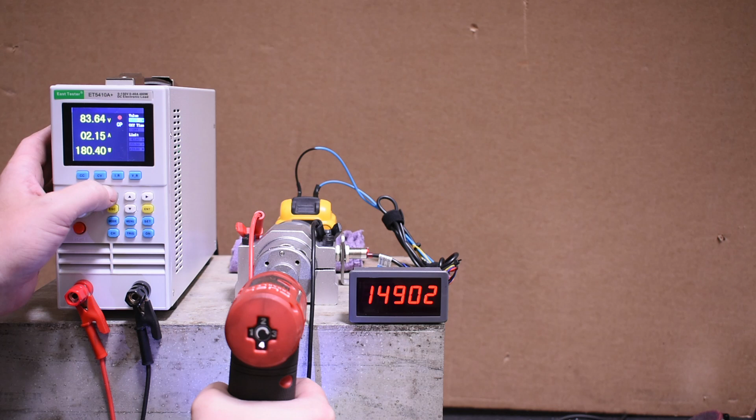We've been testing die grinders lately, specifically cordless ones, and how they stack up to traditional air tools they advertise as beating. Last time we tested the M12 die grinders from Milwaukee, which, while probably the closest in size to traditional air grinders, don't compare to 1/3 horsepower air tools they advertise to beat. At least for us, when trying to extract the most watts or horsepower these tools can muster, putting them closer to 1/4 horsepower tools when comparing apples to apples.

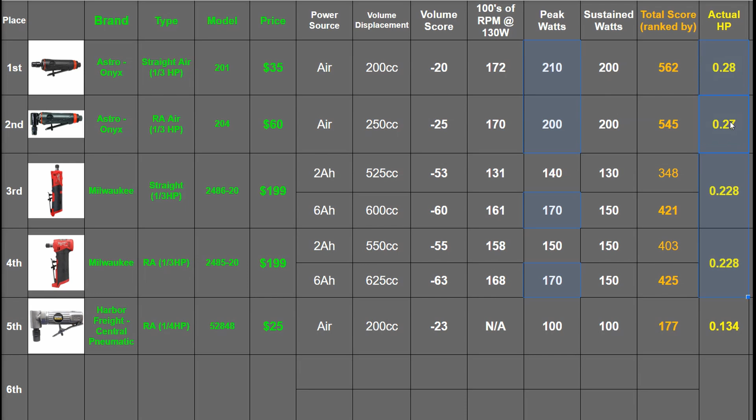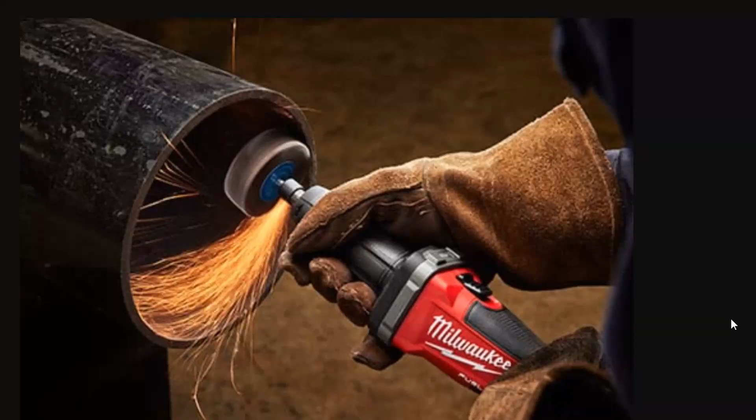Today we add 2 entries that hopefully change things in the horsepower department. Frankly, we set out to purchase 3 or 4, but there's not a lot of options when we're talking cordless in this class. But we bought this Ryobi HP PSBDG01B, which retails for $149. It's not the same size as an M12 right angle grinder, but perhaps that's a good thing for making more power. It is 18 volt instead of 12 volts, yet still miles smaller than Milwaukee's latest M18 die grinder they're coming out with, so still very much in this one-handed wielding class of die grinders. And for all that girth, it's a $50 cheaper tool as well.

So will that size mean more power? Well, the Ryobi doesn't advertise any power figures, simply that it's up to 2 times more powerful than pneumatic, which we've seen how that's gone before from the same outfit at TTI. And speaking of TTI, since they make both the Milwaukee and this Ryobi, perhaps it's not advertising power levels to not compete with the Milwaukee?

We'll see. And when we're talking pneumatic, we've yet to test anything bigger than 1/3 horsepower, so we're certainly going to rope in the help of the comparatively cheap $60 Chief brand from Harbor Freight in their 1/2 horsepower rated CH14ADG. While 1/3 or 1/4 the price of these other 2 cordless options, it's still 2 to 3 times pricier than other right angle grinders from Harbor Freight.

So all of this is going to allow us to do a few things: see if the bigger Ryobi makes bigger power, compare that to a step up in the air tool category as well, and something we've been very curious about, Ryobi's batteries, a complex and convoluted arena of options from the brand that has, at least on one occasion, caused them to call us out when we purchased their high torque impact wrench and didn't use the quote-unquote right battery.

Which the one they suggested isn't sold with the tool, by the way. They've got standard, HP high performance which is different than HP, and 21700 cell packs that they've made. So we're curious which makes the actual most measurable horsepower with no impact mechanism or hammers losing any of that in translation, just a big brushless motor versus a generator. We want to know, so maybe you do too.

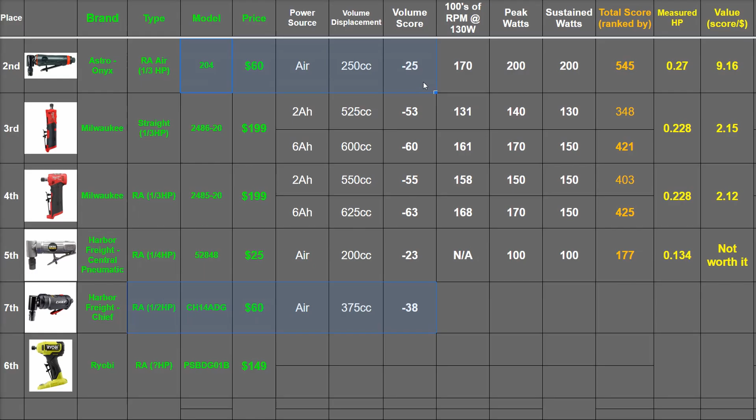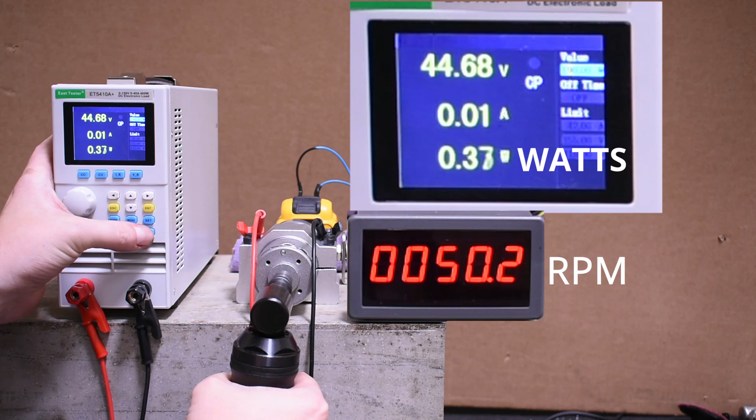Our first go at the dyno here is to see what kind of RPM this tool makes under 130 watts, which is sort of a power level you should expect from most grinders. The Chief makes about 17,000 RPM, similar to the 1/3 horsepower tools, and a little above the M12s with a large battery. Starting off at about 170 watts, which is the most an M12 will make, the air tool is pretty much unfazed here. Barging into the mid-200s, this tool slows obviously, but is still able to easily power through those levels of load.

270, 280 watts, 290, 300, 310, and it's starting to work harder. 320, you can hear it struggle, and you need to lessen the load for the tool to recover RPM again.

After repeated testing, we found this tool likes as much as 300 and can take 320 watts in short bursts, so it gets 320 peak here and 300 sustained. This is with high flow fittings, 3/8 line, and 110 psi.

But what's that in horsepower? 0.43 horsepower as measured, which with the efficiency of this motor run as a generator at this RPM would be in the neighborhood of just over 1/2 horsepower, but we mainly use this for comparison reasons anyways, like most of the figures on this channel.

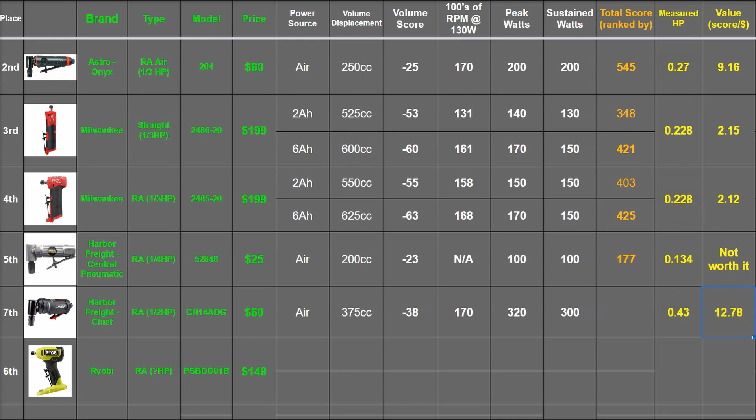I feel this very much is a healthy, and dare I say it, good 1/2 horsepower right angle die grinder from Harbor Freight. With a 3-inch disc, you could get it to slow sometimes, but in most situations, not really bogged down. It's pretty powerful. And it feels rather balanced too, no vibrations like we got from the cheaper Harbor Freight grinder.

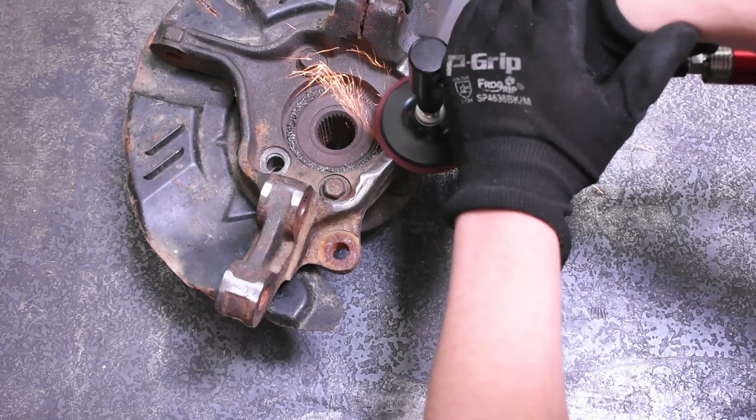With this range of power in the books, I feel we have what we need to place that Ryobi now. This 1.5 amp hour battery is barely able to do 130 watts. Maybe ours is just old. I can't get myself to buy another one of these at this kind of performance though. I say skip that one.

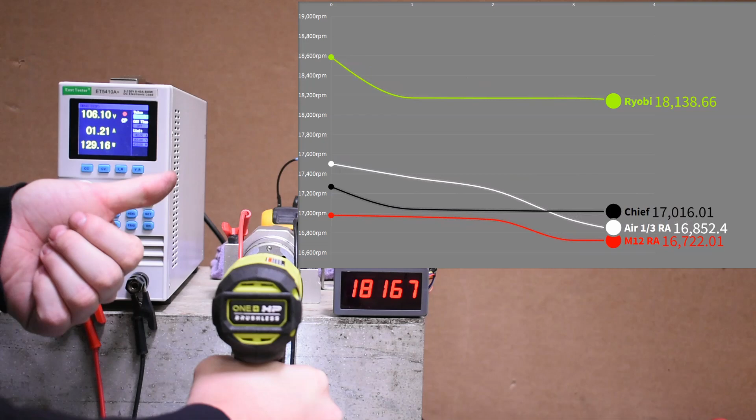Here's one of their standard bargain 4 amp hour batteries. At 130 watts, it makes 18,100 RPM, which is much better, the most revs we've gotten from any die grinder at this load ever. With most batteries from here on out, this Ryobi makes similar RPM at this level.

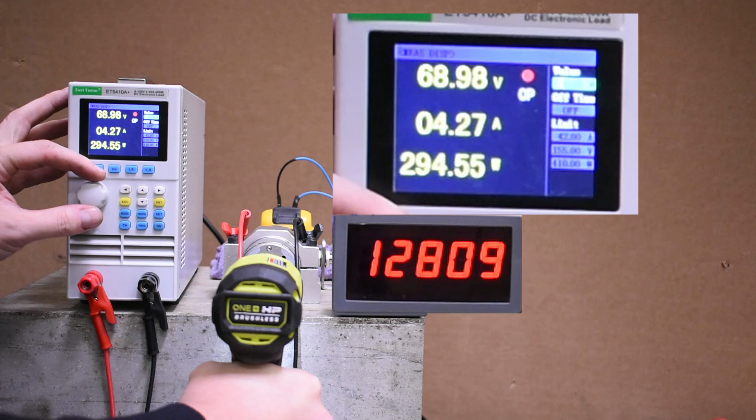Let's see what this 4 amp hour can make. 170, 180, 190 watts, 200, 210, 220, 240 watts, 260 watts, and at 270 and 280 it does dive in RPM but can keep it up from there. 290, 300 watts, and it really digs in and becomes quickly tapped out. So 290 watts or so here.

Oddly, we found that the HP battery, the 4 amp hour, also sees similar results. At 300 watts, it can do that more capably, but does fall off at that level and is more comfortable when turned down lower. So similar to the standard 4 amp hour.

Now for the P195 3 amp hour battery, our favorite choice, and therefore Ryobi is discontinuing it, of course. It's got one row of 21700 cells. Picking up where we left off: 290 watts, 300 watts, 310, 320, 330 watts. 340 causes it to dive a bit, and the tool eventually cuts out into protection mode at 330 watts again, and it would do that each time. So 340 in brief peaks and 320 sustained is what it can make.

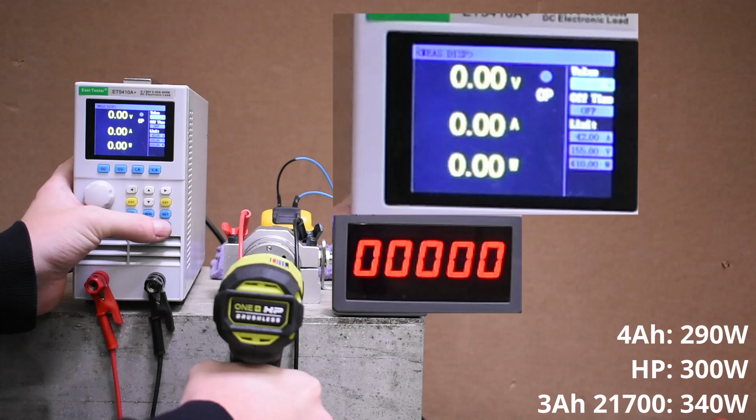Now for the battery Ryobi suggests in place of that one, saying it's better than the 21700 cell 3 amp hour pack, and wrote to us saying as much. The 4 amp hour high performance, this high performance being written out in full here. 280, 310 watts, 320 watts, and we found even after letting it cool off, it didn't like much more than 310 or 320 watts. Who knows why? Maybe it's because this tool doesn't have HP contact pickups.

Not sure though, it clearly draws enough power to warrant those pickups, and I feel at $150 it may deserve it too. Even before we clip on a huge 9 amp hour, this tool gets dinged quite a bit for its footprint. This Ryobi required us to buy a new water jug, tipping the volume scales at 1100 cc's for the compact 3 amp hour and 1200 for the 4 amp hour high performance, almost 1225 on that one. Which means, yeah, it's big in comparison to all of these.

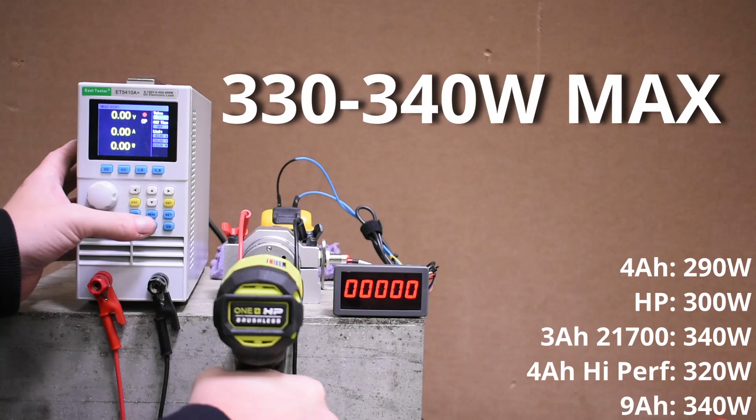Now the 9 amp hour, that's also big and powerful, yes, but it just causes this tool in particular to enter into protection mode quicker than any other battery. 330 watts is as much as any battery is going to deliver with this tool. But that's pretty dang good. 340 watt peak, 320 watt sustained is as much as 0.46 horsepower, beating out what we felt to be a very beefy air tool in that Chief.

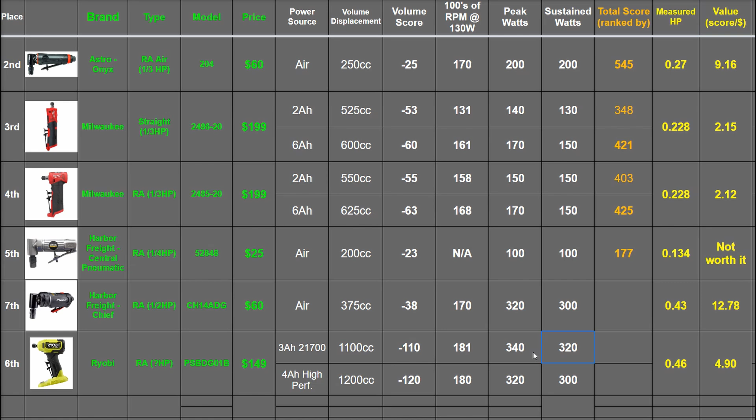We could not get this tool to enter into protection mode while just using it as a grinder, and very rarely would it slow down until you used a battery that wasn't fully charged, which is my main complaint with the Milwaukee tools. They enter into protection mode all the time, so this sort of solves that most of the time. Now let's see what that looks like in the points.

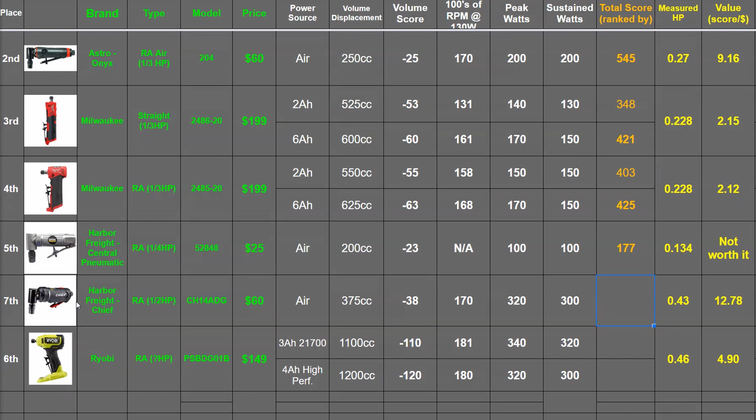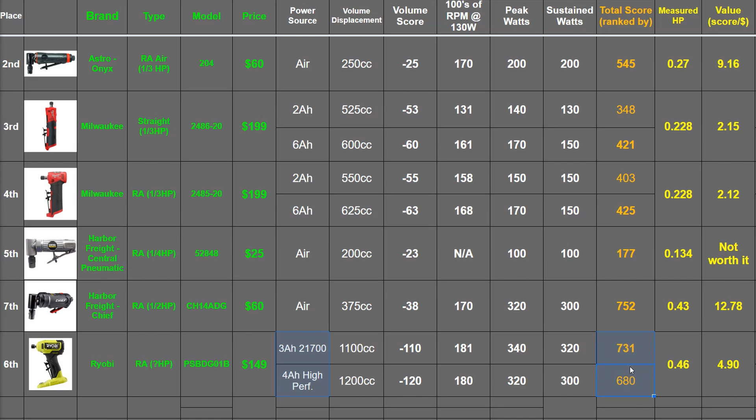The Chief gets a 752 with its smaller size and price, and the Ryobi gets a 731 with a 3 amp hour battery and 680 with a 4 amp hour high performance. Putting the Chief in first, but being way closer than we thought with this kind of hamstring over here.

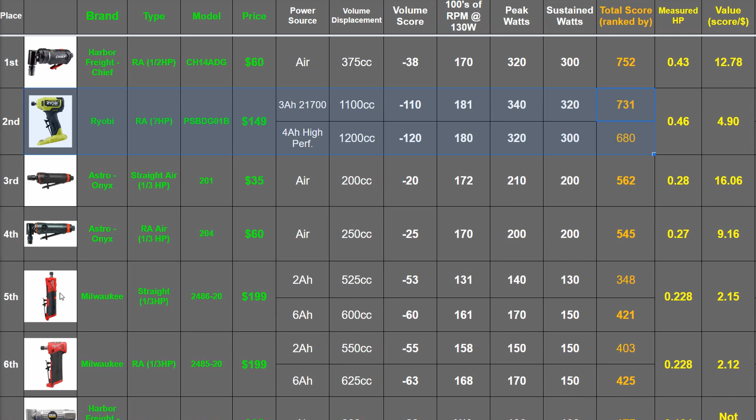Certainly the best one-handed cordless die grinder we've tested, and considering there aren't a bunch of these out there, maybe that exists. And the lowest price one on the market as well. Considering Ryobi's sometimes awkward battery shape, fully on display here, it makes you wonder what a brand like DeWalt could do with a 20 volt die grinder this size, but with a power stack. Until that day or something similar, the Chief is pretty good if you need more air power, and the Ryobi is looking like a dominant force with this non-two-handed battle axe size of automotive die grinders that we find most handy.